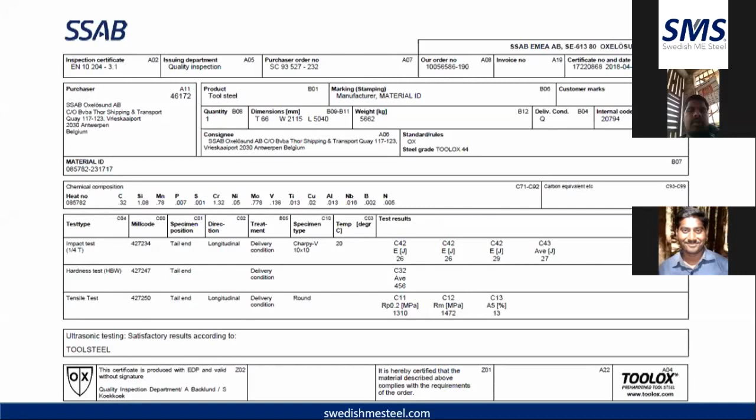The blast furnace which we use in the manufacturing of the material - the material is not from scrap, it is from virgin raw material, due to which we are able to get clean material.

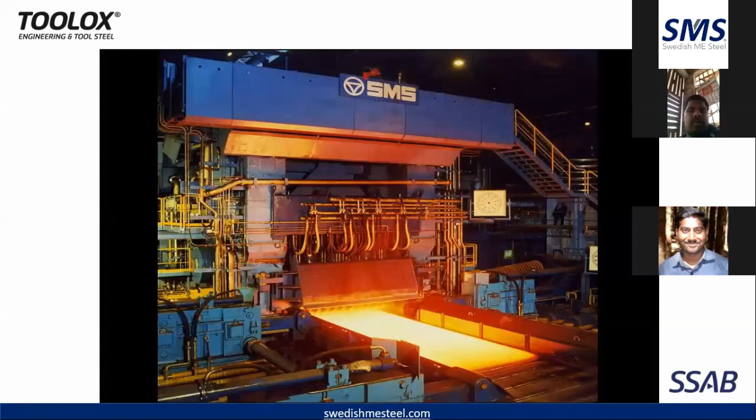These are the slabs which come out of the rolling mill, and this is where the entire R&D of this pre-hardened steel lies. As you can see, the steel here is water quenched, and it comes out in red hot condition and turns into room temperature within a matter of seconds. For different thicknesses of plate, the quantity of water quenched at different angles determines different properties of the metal that is achieved. So this gives you the exact R&D of the material.

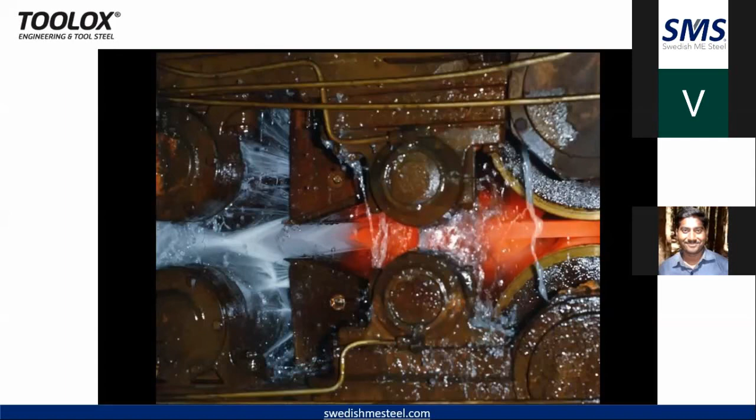As I had already been saying, Toolox is a multi-purpose, ready-to-use engineering steel based on a high-strength, low-alloy concept. Toolox is delivered in two different grades, Toolox 33 and 44. For both grades, we claim the toughness values to be very high, for the simple reason that this property of the material helps in different applications of cold forming.

So it's been produced by SSAB. They have been experts in doing these advanced high-strength steels and quenched and tempered steels for more than 100 years now, and we are the authorized supplier for the same.

So Toolox is available in two different grades, in plates up to 165 thickness, and in round bars from 16 mm to 353 mm. In round bars, the 16 mm to 200 mm is all rolled, and plates are all rolled. Bars above 200 to 353 are all forged.

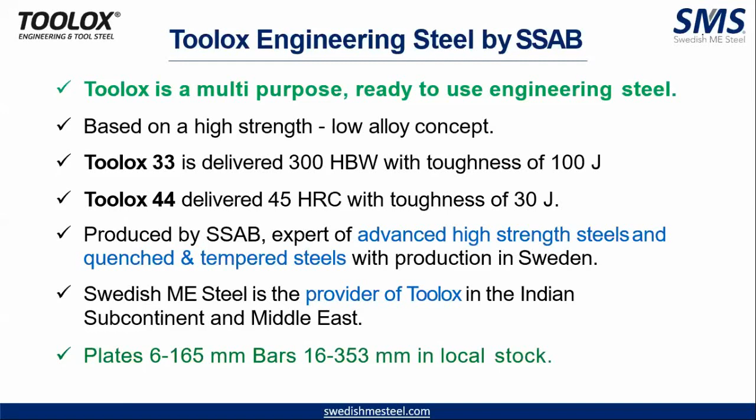So since being a pre-hardened material, delivered at 45 HRC to you with high tensile and yield strength properties, what you get is that with one single material, you will be able to cater to different applications. Obviously we'll stick to cold forming applications alone for today, but it can be used for plastics, for hot forming, for all engineering applications also.

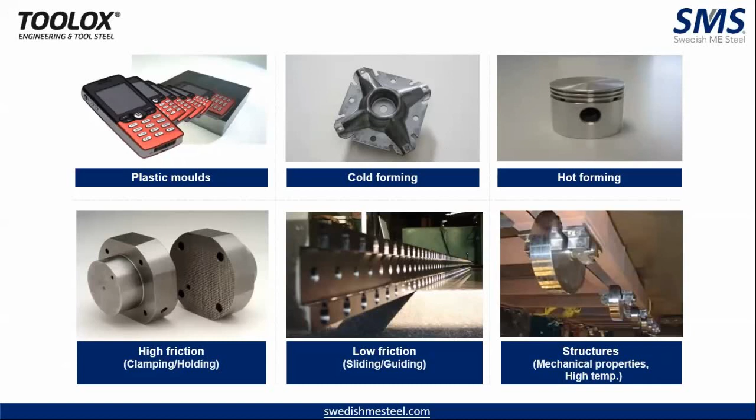So let's delve into Toolox and cold forming. We'll just get into the technical analysis and different customer benefits.

So these would be your regular cold working tool steels, right? Your D2, your D6, your A2, your O1, your Calmax. There are different varieties of cold forming tool steels available, and each individual material comes out with its own properties and different applications.

The benefit you get out of this particular pre-hardened tool steel Toolox is, if you choose your application wisely, then it is possible to replace every material out here with one single grade. That will be the beauty of the material. On the course of the webinar, we will see how exactly it is going to replace.

So as given here, the selection of the Toolox grade depends upon many factors, including what is the work material that you use, the different forming conditions that you require, the production volume that you need, and what are these different surface conditions that is there.

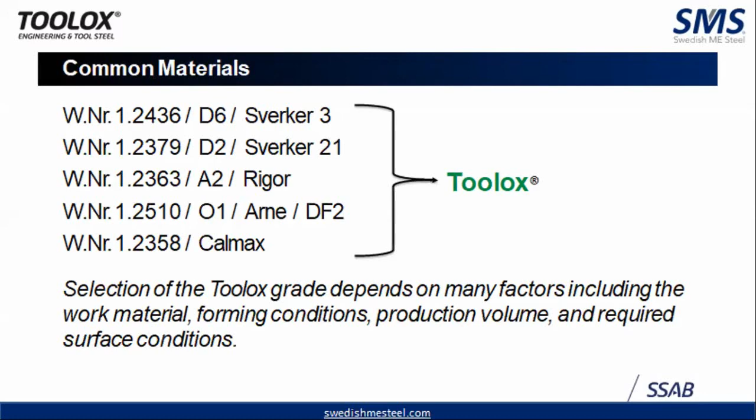So while making a die, there are two areas that every tool maker wants the tool steel to perform. At the surface level, there are three important things that the metal should do. It should resist different types of wear. Obviously, high surface quality and finish it should have, and it should be suitable for surface engineering, any kind of nitriding or PVD that you do along with material.

But at the matrix, during the working of the die, metal should be able to resist chipping and cracking, which I believe is the bulk of the problem for many of the tool makers. It should carry forces for the service load, dimensional and shape stability. It should also be friendly to various workshops.

Our pre-hardened material gives the right balance wherein each and every point mentioned, with its unique properties of toughness and hardness, will give you good results.

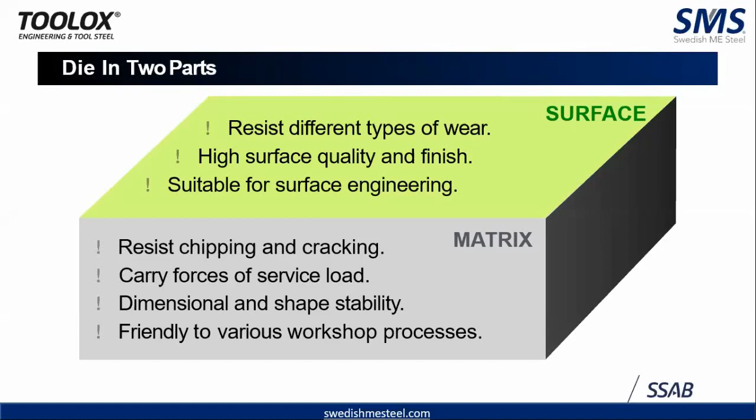And adhesive and abrasive wear can also be taken care of by providing good surface engineering solutions.

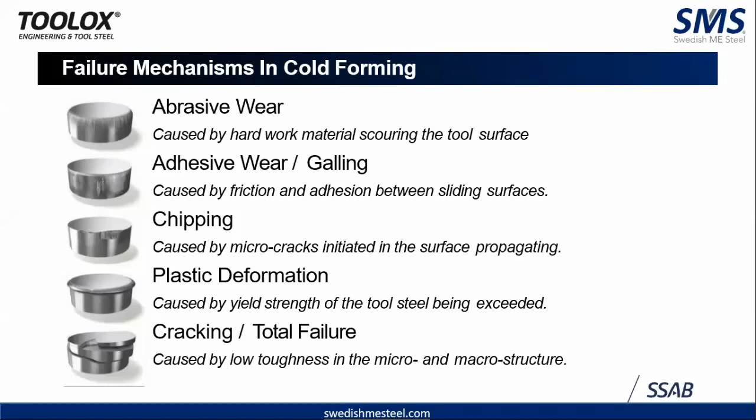So this graph gives you an abrasive wear test, wherein Toolox at 45 HRC and Toolox with nitriding, which can go up to 62 HRC, you can see the relative service life improves quite a lot. So depending upon what kind of output you're expecting out of the material, you can decide whether to go along with Toolox 44 itself or with Toolox 44 plus nitriding.

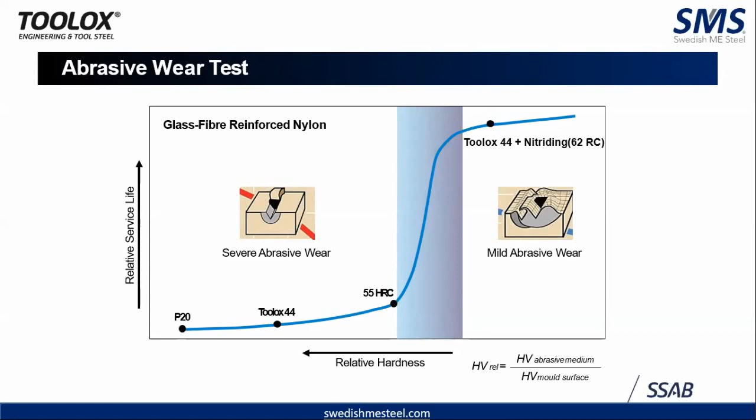So adhesive wear test - different parts being put into the press and the subsequent result being given. So 0, 1, and 2 comes out good. And figure number 3, it is not approved due to the scratches in the entire part.

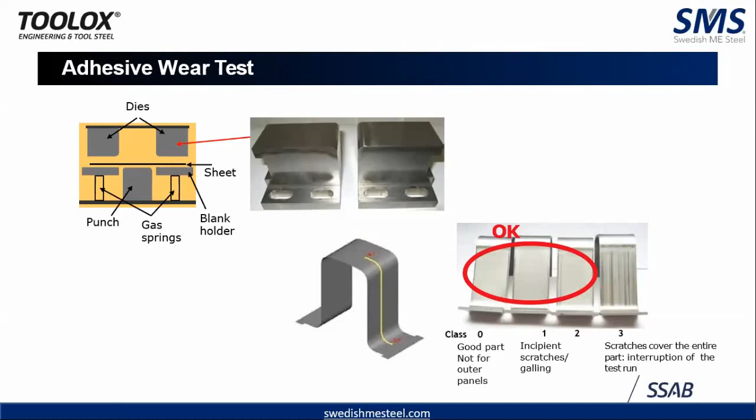These are the factors which affect the adhesive wear: the contact pressure, the quality of the tool surface, and relative slide velocity, as well as the additional elements separating surfaces. So for each and every factor which has been mentioned, so often we try to look at the problems in our hand. Okay, fine, this has happened. It is only because of X or Y.

So I think most of you will agree that we can go to our basics, that each and every issue has its own problems tied to it, and it has its own engineering explanation. So whether it is pressure or the tool surface or the sliding velocity or the separating surfaces, you can check for yourself, and then you can choose trial and error method and come to a strong solution.

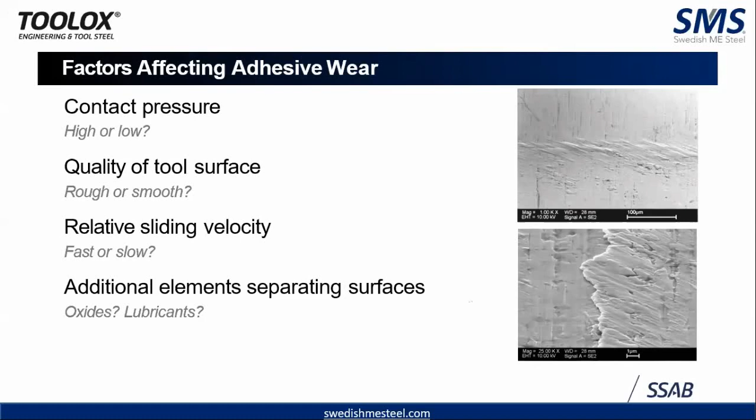So what you got? You got a material which is extremely stable, which is homogeneous. So you need not do machining in any particular direction. In any direction, it's possible to machine the block. It can achieve extremely high demands in flatness, up to 0.1 mm over a 4-meter length, which is precise.

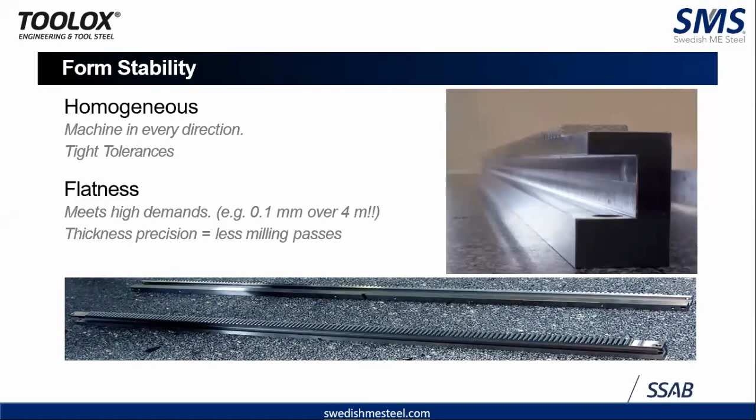But this benefit it can give you right away in manufacturing using this pre-hardened tool steel. So as I said, Toolox is with ESR properties and with very unique properties of toughness, hardness, and tensile strength, which gives you an excellent substrate for surface engineering. So for all those who are asking, okay, fine, it is 45 HRC. What if I need to do cutting at 58 HRC, 60 HRC? How can I do it?

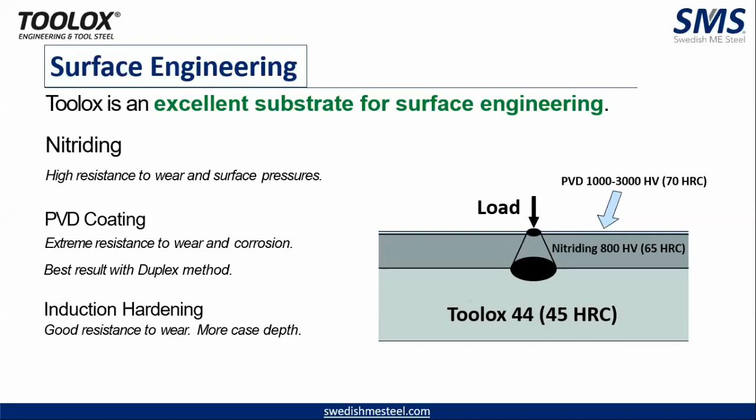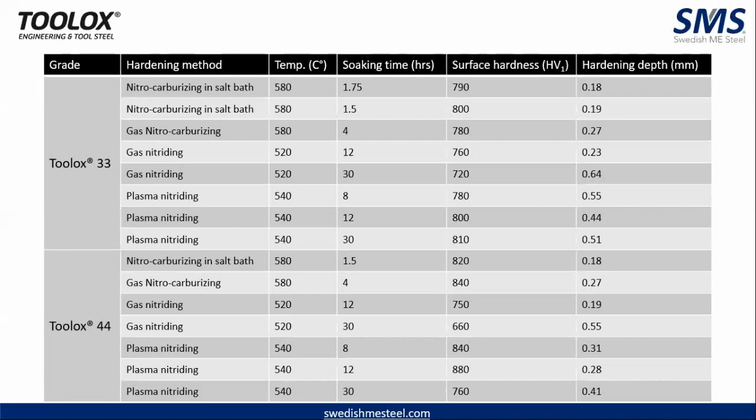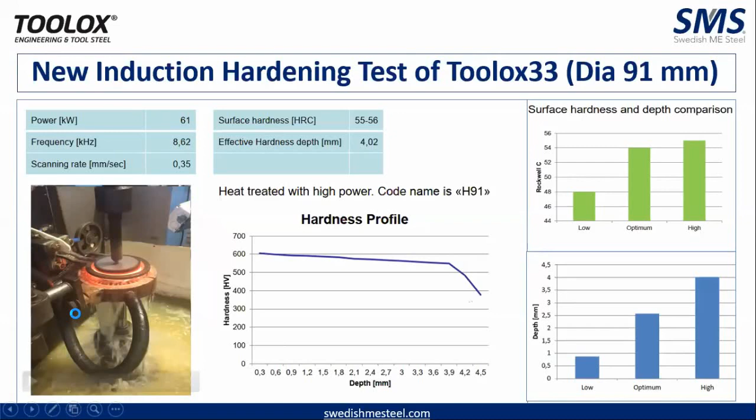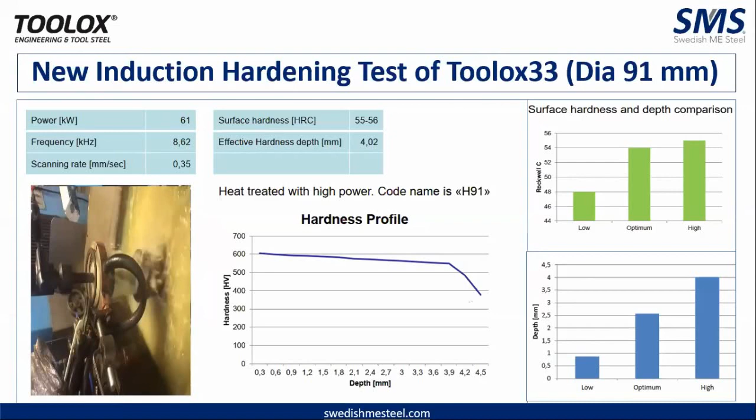So this is another induction hardening test which has been done. This is for Toolox 33, 30 HRC material. So the quenching medium is water here. Obviously it has been hardened with the standard procedures. There are various ways in which you can play with this, but the point to note is that you can achieve 55 to 57 HRC with a depth of hardness of 2 to 4 mm.

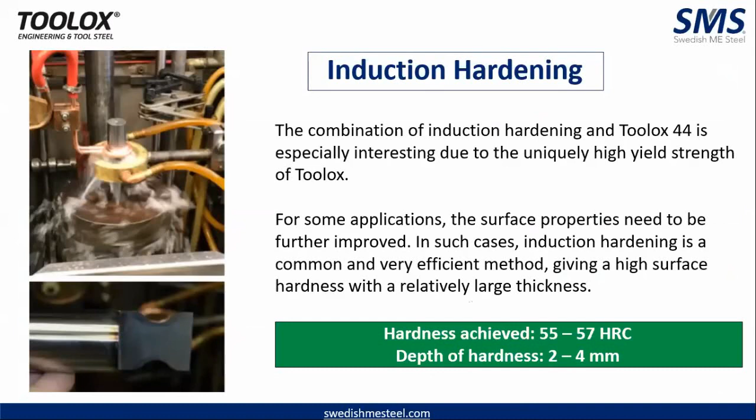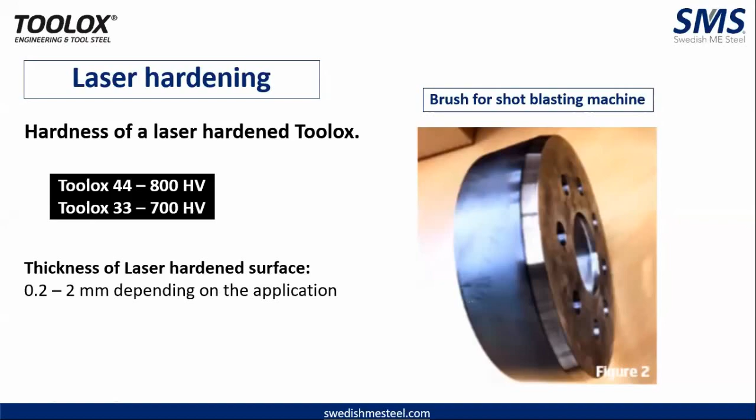So since it is a 45 HRC material, I think there will be quite a few who have questions of how the material can be machined, whether special tooling is required, things like that. Yes, you can very well machine Toolox 44. We'll see certain parameters which we have designed in collaboration with the mill. So we have recommendations for each and every operation that you do: turning, milling, drilling, and tapping. For those who are interested, we can share the workshop recommendation brochure at the end of the webinar.

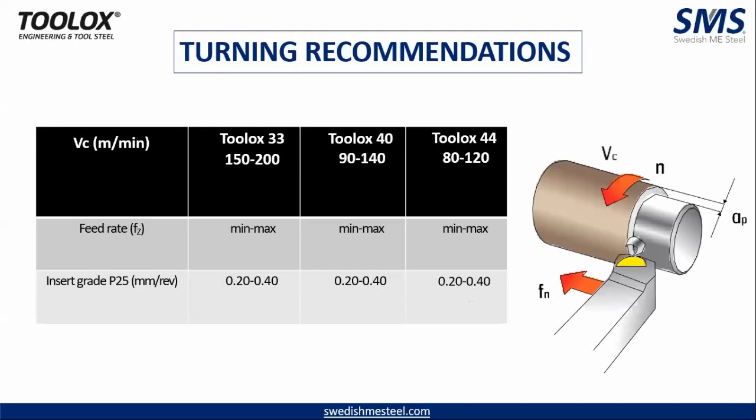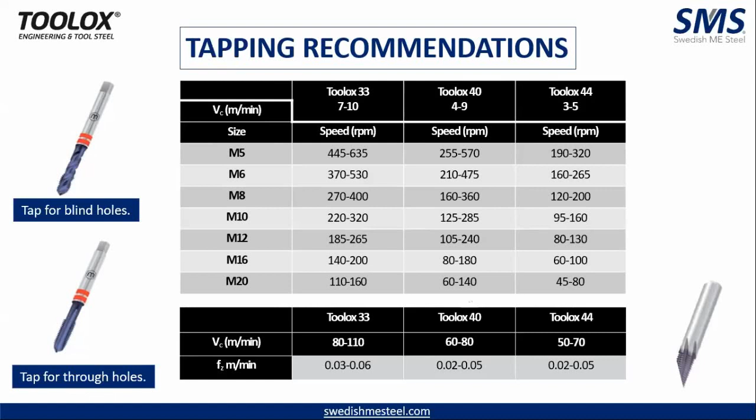So this gives an idea of the turning recommendation: what is the feed rate that you can do and insert grades. Different tapping recommendations, the values which you can do for Toolox 33 and 44. For tapping, we recommend machine taps from M5 to M20. Below M5, we recommend thread milling. We don't recommend tapping below M5. And these are tool recommendations for drilling.

And what you have here is all European dealers. Some of them may be available in India, some may not. You need not worry. We have also come up with local solutions for both the drilling and tapping. But even then, you can just speak to your current tooling supplier and ask them to supply similar tooling. That should be able to do the job.

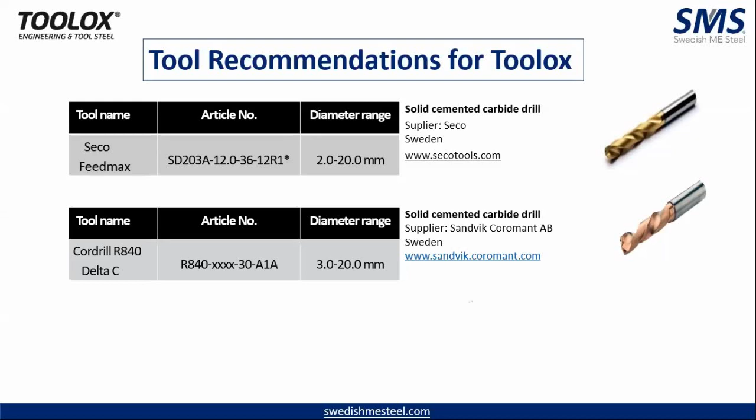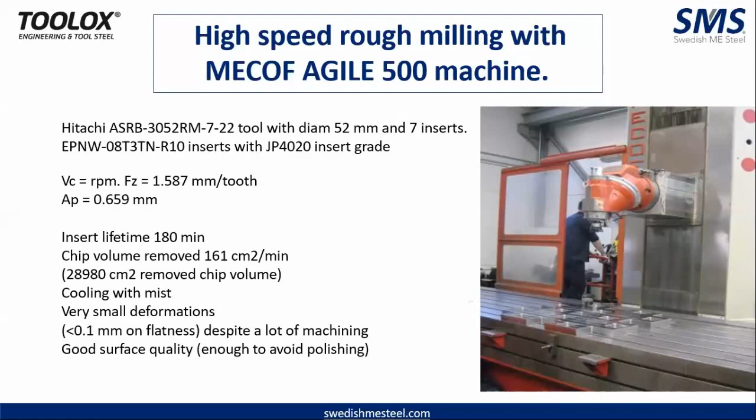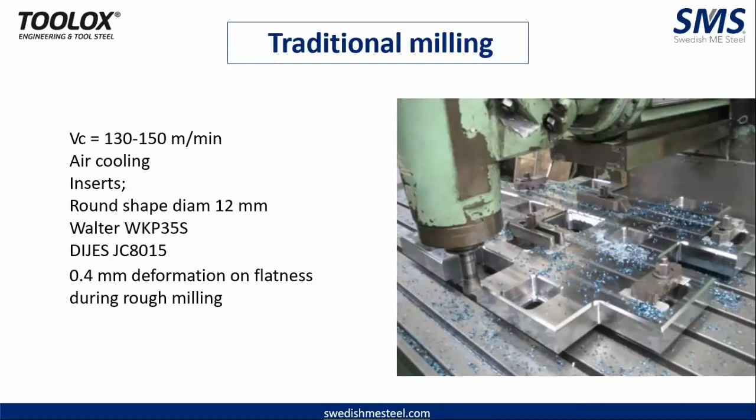This is traditional milling, using Walter tools, which are widely available. It's 0.4 mm deformation on flatness during rough milling. So this is the milling which was done in a tool room in Pune.

So as you can see, it does not always require expensive tooling. You can find your own tooling if you start working with the material. As you can see, the chips are very bluish. There are no stresses in the material. Whatever stresses it incurred come out in the form of chips. So before going to the application front, I will show you one more video on the machining.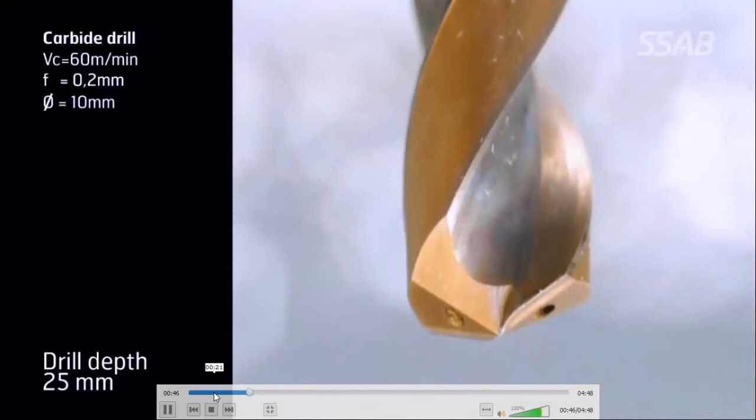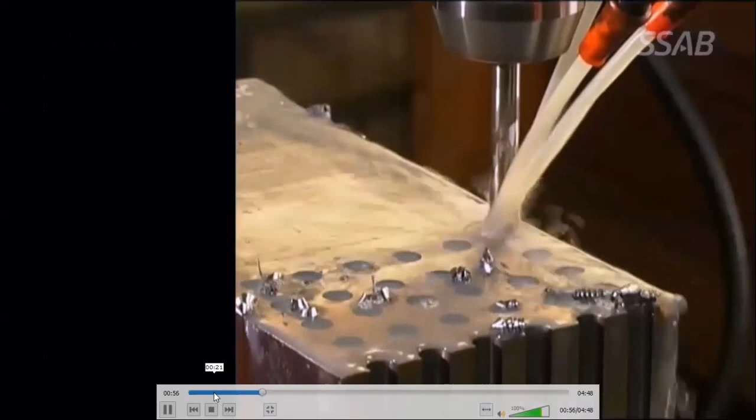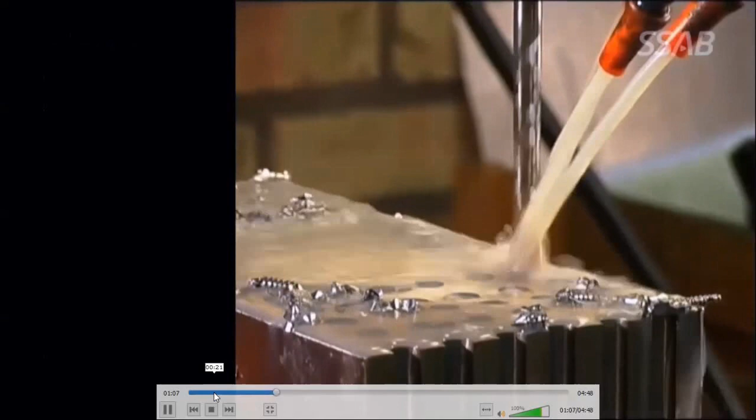So this is a drill depth of 25 mm length. A carbide drill has been used for this particular thing. So even long hole drilling is possible.

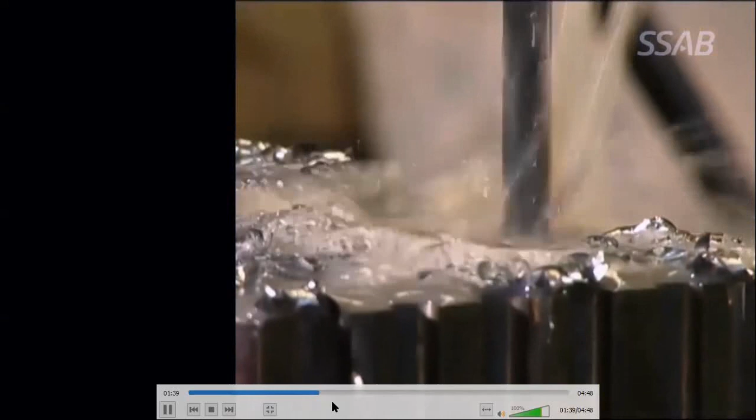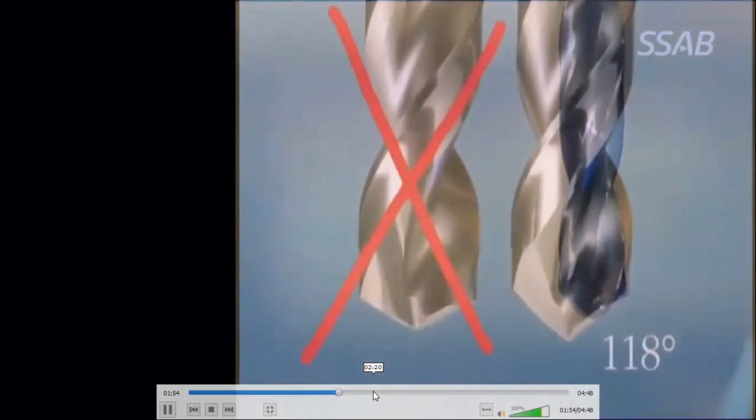So you can grind your tool angle to 118 degrees. The drill depth that's been done is 230 mm. So even a 2 mm drill is possible.

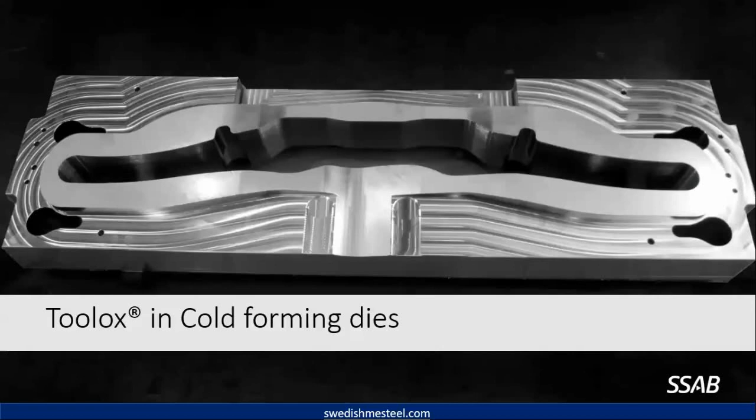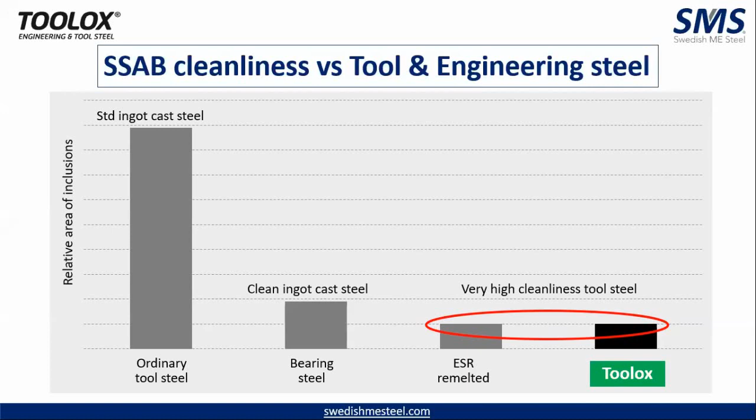So you have seen it's very much possible to machine the Toolox block. No problems in that. So let's delve into the application part, and see how it is helpful in different types of application. As we have been saying, the cleanliness level of Toolox is higher. When you compare to an ESR remelted steel, Toolox has very high cleanliness, almost close to ESR, or sometimes better than even ESR remelted steel. So in the end product, the area of inclusions is very, very less, which gives better performance of the material.

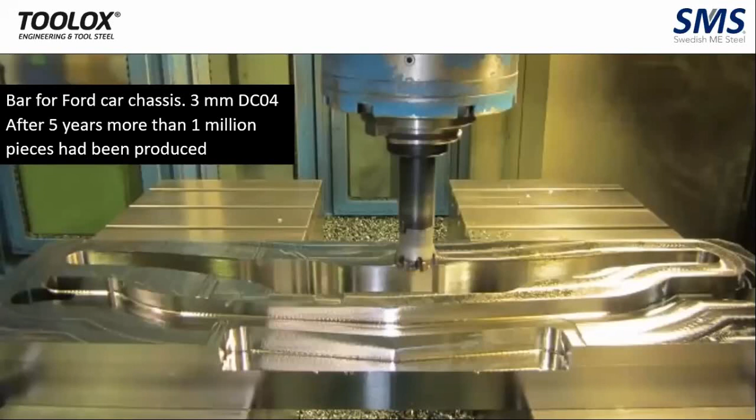So this is a Ford car chassis, 3 mm DC04. After 5 years, it has produced more than 1 million pieces. But the important point to be noted here is it's a single monoblock. If it had been a D2 material, you would have made 5 different segments. So you would be doing 5 different designs, 5 different steps of machining, and also 5 different commissionings. So the amount of time and money that you can save with Toolox 44 is enormous.

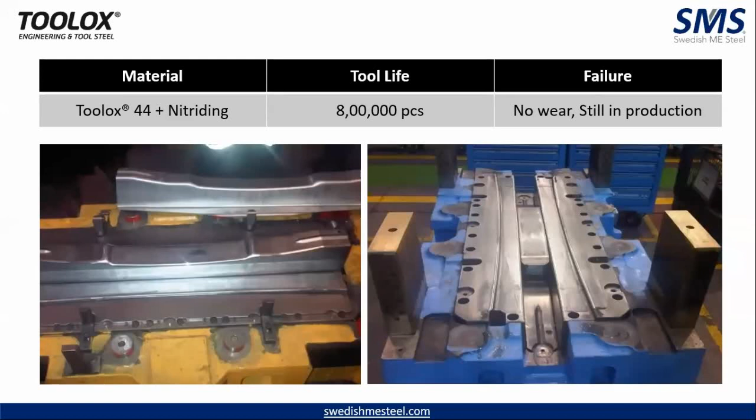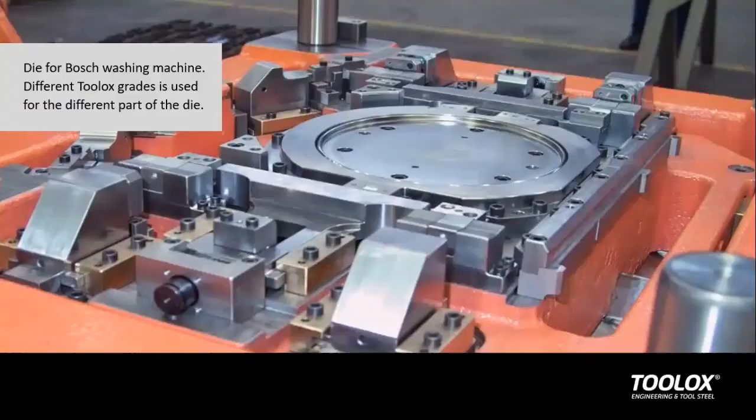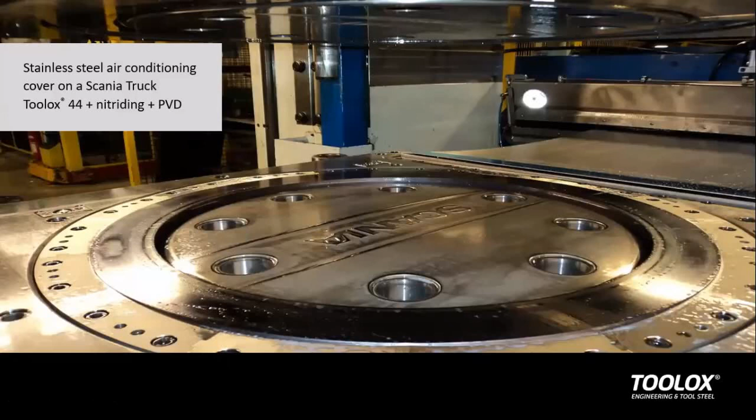This is another example for Toolox. Again, Toolox 44 plus nitriding. Each single side has been a monoblock. It has run 8 lakh components and it is still in production. Different components for Bosch washing machines have been produced by Toolox. These are different parts of the die. And this is a stainless steel air conditioning cover for a Scania truck. This application required Toolox 44 plus nitriding plus PVD.

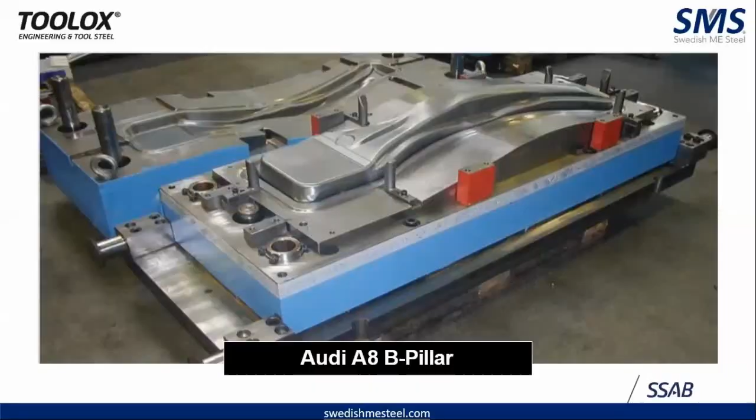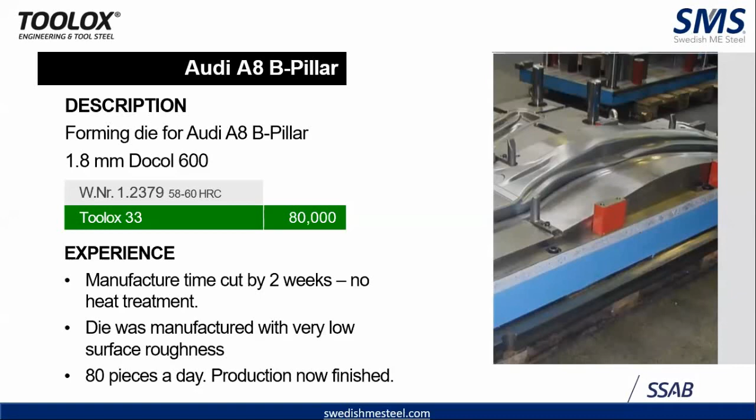This is an Audi A8 B pillar. The sheet metal thickness was 1.8 mm. It was Docol 600 MPa sheet. The previous material was D2 at 60 HRC. They were able to reduce the manufacturing time by 2 weeks. No heat treatment is required. The die was manufactured with low surface roughness. Being a high-end car, the production level is very low, 80 pieces a day. The spring seats are the areas where you will face cracking issues. Thanks to the toughness of Toolox 44, you are able to address that.

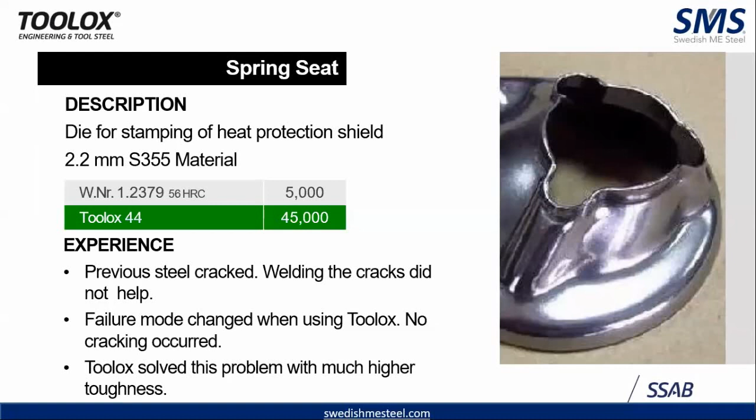This is a die used for stamping a heat protection shield, 2.2 mm of S355 material. The previous D2 failed at 5,000 components due to cracking. Welding the cracks did not help because the carbon equivalent is high in D2. The failure mode changed when using Toolox; no cracking occurred. So not only does it help with better manufacturing time, costing and heat treatment, but also with all the problems you face in tool making: chipping, cracking, edge retention problems, deformation. And it also gives a new perspective on the design front itself.

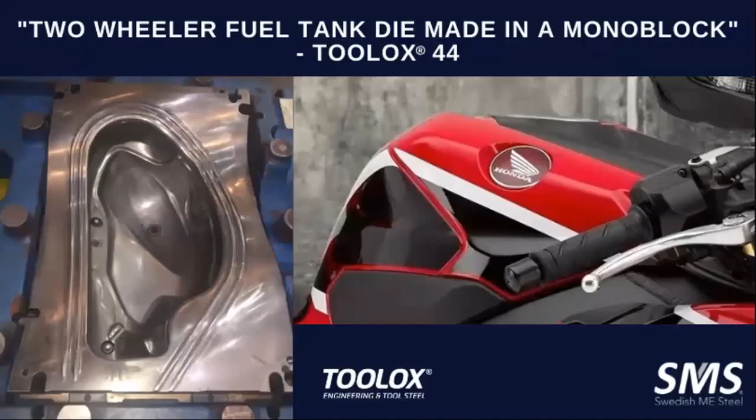So let's see a couple of applications in deep draw. This is a tool that we did for Honda. This single piece is 1 ton. As you all know, this is for a two-wheeler fuel tank. We have scooped out 500 kgs of material from it. No stress relieving after machining. We have done nitriding at 550 degrees centigrade. No problem with distortion. We were able to match it.

The important thing here is that the previous solution it replaced was casting plus chrome plating. With casting, every 80,000 to 1 lakh shots, you need to bring the die out to the nearest recoating center. So during the entire lifespan of that die, it comes out at least 10 to 15 times, and each time production is down for 2 weeks. Toolox 44 plus nitriding: the last we heard was 5 lakh components without any issues. That's the benefit that the material can give you.

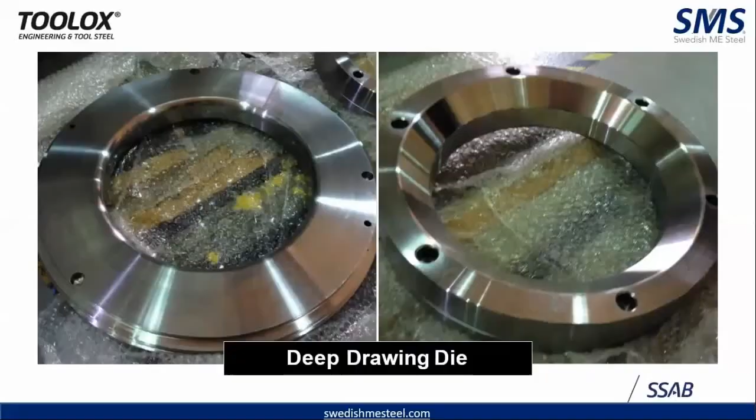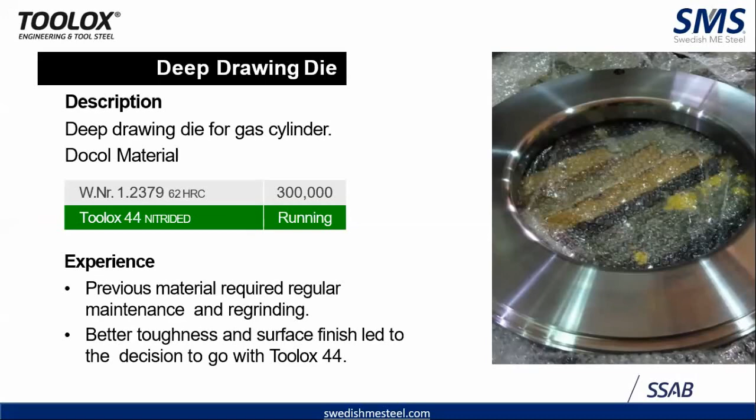Die again, previous being D2, Toolox 44 plus nitriding, it is still running. Previous metal required regular maintenance and regrinding. So both the better toughness as well as the surface finish, which you can achieve through Toolox, decided the customer to go to this material.

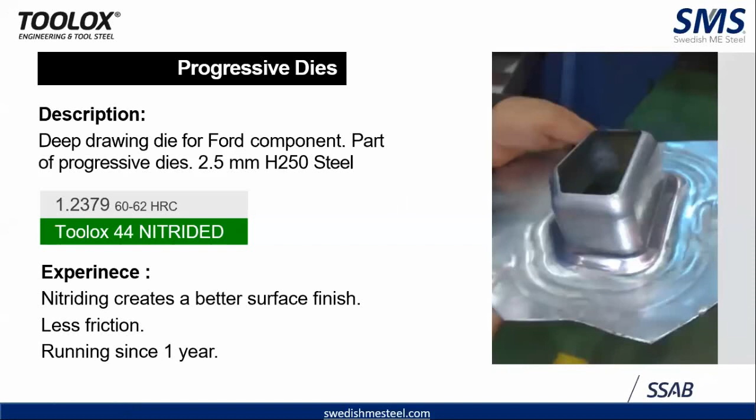So this is the area where you often face the issue of fatigue cracks. It's a deep drawing die for Ford component, part of progressive dies, 2.5 mm H250 steel. And D2 has been used at 62 HRC; Toolox 44 plus nitriding has a better surface finish and less friction.

Let's move on to cutting applications. So like the forming, deep draw and the bending application that we saw, based on experience, we have come out with a common chart here also, which gives you an idea of Toolox 44 using which kind of surface treatment you need to go ahead.

So if you're using sheet thickness of 0 to 3 mm, we recommend Toolox 44 plus induction hardening. We don't recommend nitriding there. If it is between 3 to 6 mm, then Toolox 44 plus nitriding will work. If it is anything above 6 mm up to 15 mm, then Toolox 44 plus induction hardening or laser hardening is recommended.

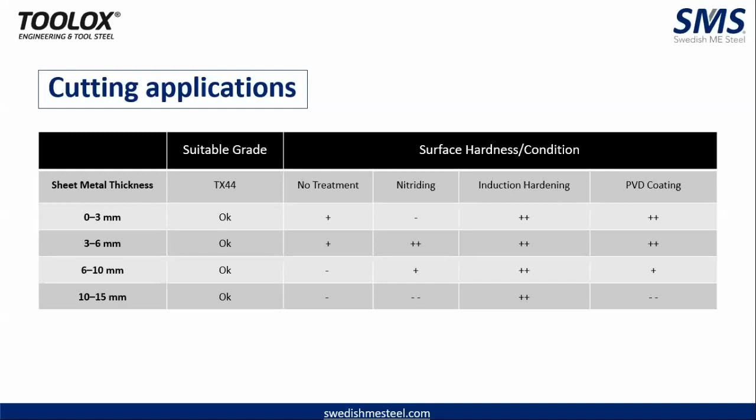Let's see some applications. So we have always been saying that the material has very low carbon equivalent, it can be cut, it can be welded. So this gives you a live demonstration of how it can be cut. So this is a Toolox 33, 100 mm block.

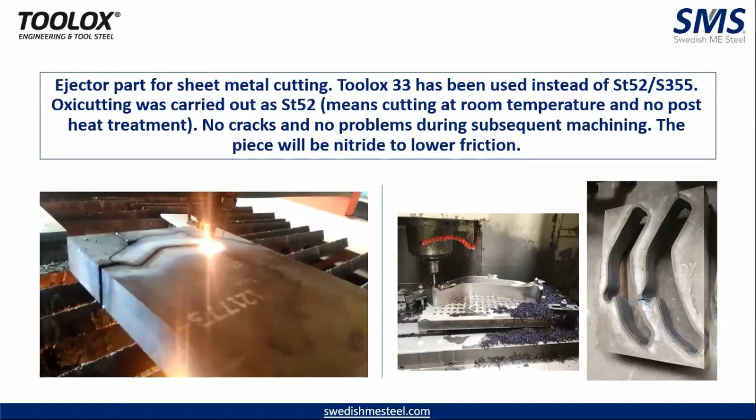So if this is the insert that you want to produce, you can directly cut your insert profile in the plate and machine only 5 to 6 mm of the heat affected zone. Compared to your regular manufacturing technique, this would save you a lot of time. Even after thermal input, there are no cracks, no problems in subsequent machining. So this is the component which has been produced.

And another cutting example, it's an induction hardened cutting edge. The sheet was 0.9 mm sheet material cutting. So here, as you can see, the initial component was D2 at 56 to 58 HRC, tool life of 20,000 shots. The failure mode was cracking.

Then Toolox was used as a replacement. Since being less than 3 mm sheet thickness, Toolox 44 plus induction hardening was used. Hardness was 57 HRC, 50,000 components, no problem. And at 80,000 components, you have a problem of wear, but not the problem of cracking. So if you have any area where cracking is your issue in any of your tooling requirements, then Toolox can be an immediate substitute.

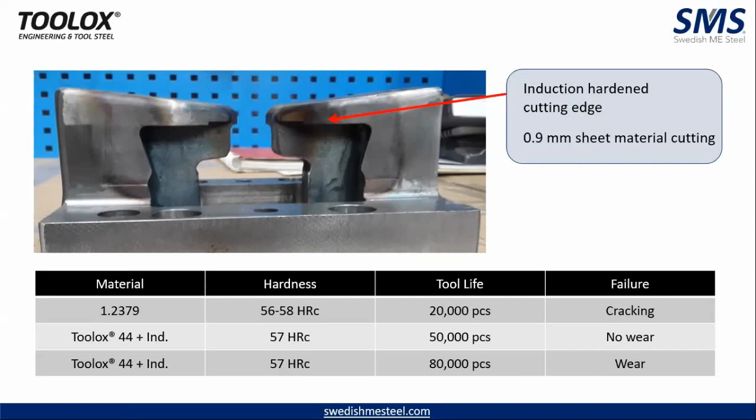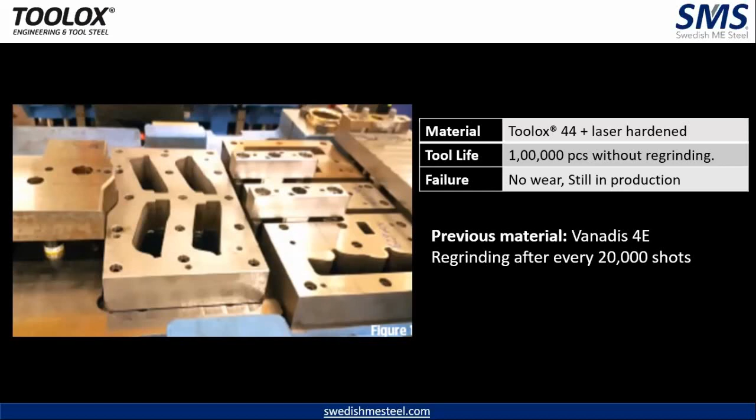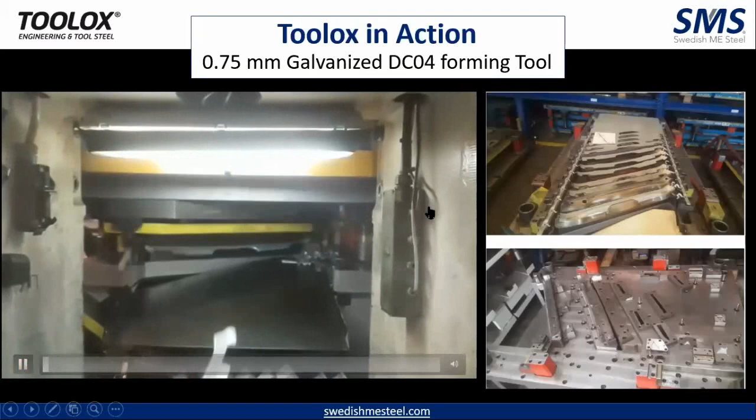With Toolox 44 plus laser hardening, so far we have done 100,000 shots without any regrinding. That's the benefit the metal can give you. The various components being produced using Toolox 44 plus laser hardened. So Toolox in progressive dies. 0.75 mm galvanized forming tool.

So that comes to the end of the webinar. The key takeaways: we have discussed the different quality levels of the manufacturing process based on which we are able to achieve a metal with a unique combination of toughness, hardness, and tensile strength. Obviously, it doesn't require any heat treatment, so money and time can be saved.

So you can term Toolox as a pre-hardened version of your cold working steel, your D2 or A2 or D3. So Toolox can come into picture. We have dealt with the complete spectrum of cold working applications, from cold working to deep draw to forming to cutting. And we have seen case studies from across the globe.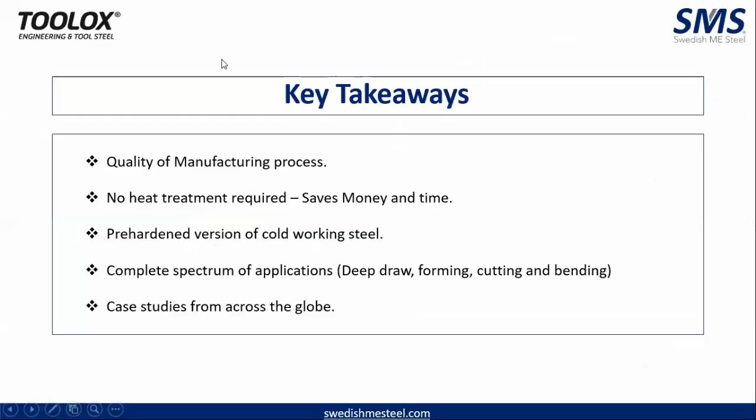We have a question from Mr. Paddy: we work extensively in 0.5 mm SS sheets, so is forming PVD fine, or would you recommend nitriding? As we mentioned during the presentation, if your sheet thickness is between 0 to 3 mm, Toolox 44 plus nitriding is more than sufficient. The only thing you need to decide is the exact tool life you want. If the required tool life is very high, you can do PVD also, but Toolox 44 plus nitriding should be sufficient in your case.

And one question from Sriraj PV: what is the standard in ultrasonic testing that you are following? I don't have the slightest idea. Baris, can you come on this?

Hello, can you hear me? Yeah, I can hear you. Yeah, go ahead.

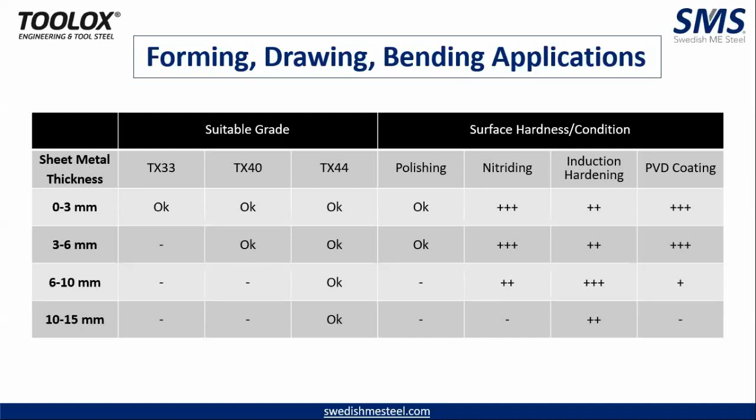We have another question from Mr. Lakshmikant: will it be suitable for forming stainless steel grades 300 to 400 series? Yes, sir, absolutely possible, no problem. We also showed one example for you. This is an SS part which has been formed. The only thing is, depending upon your application, you need to choose which kind of surface treatment you're going to use. But it's absolutely possible.